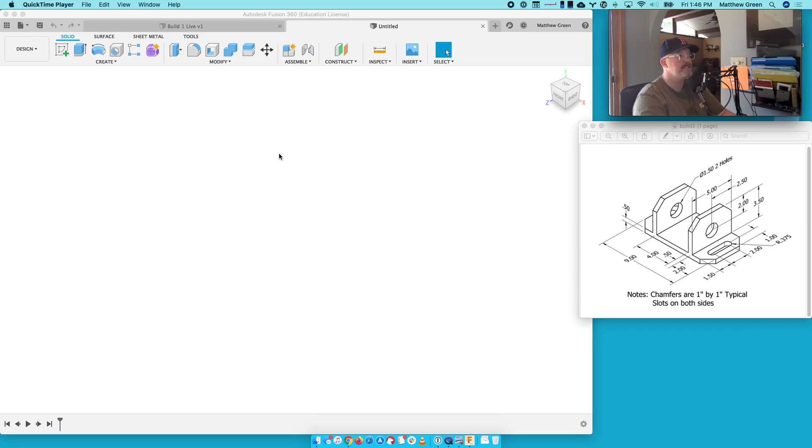We're going to do Fusion Build 2, Autodesk Fusion 360. How many times can I say Fusion before we start? Fusion. I can say it more times. I can say it more times.

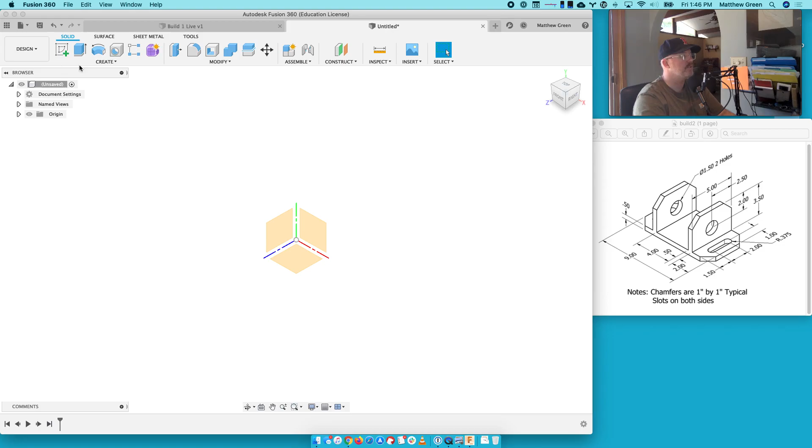All right, so I've got a new design here. I'm going to turn the origin back on just for the beginning. And I'm going to make a base plate rectangle that is 9 inches by, what's this dimension? 5 inches. So let's make a sketch on the bottom. Go ahead and hide my origin. Rectangle. 5 in that direction, 9 in that direction. Hit return, finish sketch. Home to zoom out.

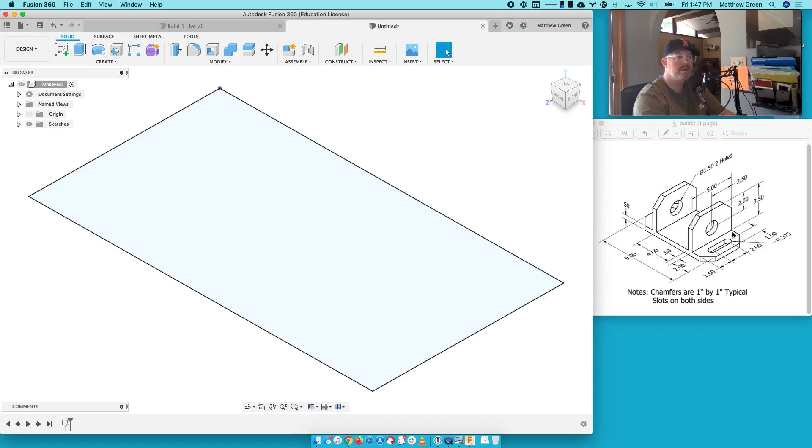Looks great. All right, now we're going to extrude up. And I need to figure out how far. All right, the base plate itself is 1/2 inch thick. And then these big old tab thingies, I don't know what to call them. They're 3.5 inches. So let's extrude a distance of 0.5 plus 3.5. Yes, I know that's 4, but I'm showing you an example of adding in Fusion. All right, now I got a big block.

Let's do some cutting. All right, let's see. First flap here is 2 inches in from the side and 1/2 inch up. So how about I do a rectangle that comes down 3.5 inches and comes over 2 inches. How about that? And then let's mirror because it's fun. Mirroring is fun. I like mirroring. Mirror that piece and that piece over that line. Boom. All right, we're mirrored.

Now we got to cut out the middle. So there's a distance of 1/2 inch. So these things are each 1/2 inch thick. How do I want to do that cut? Let's do a line that goes over 1/2 inch. Let's do another line that goes over 1/2 inch.

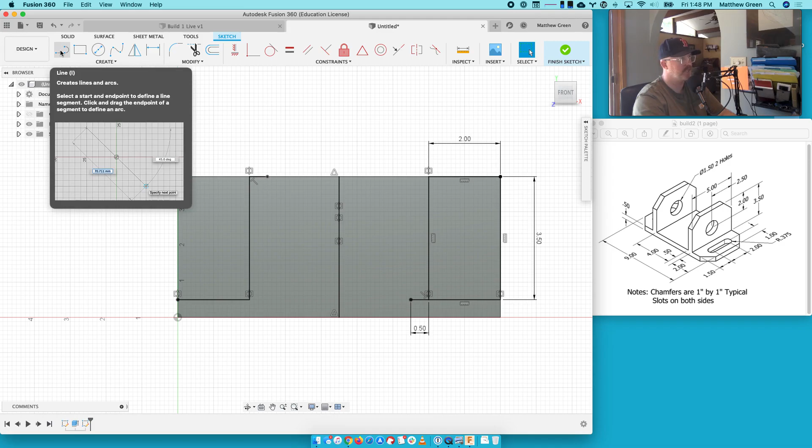And I didn't say this, but I was using the keyboard shortcuts. I was pressing L for line. Notice how when that menu pops up, it shows you an example. And right next to line in parentheses, it says L. That's the keyboard shortcut. So now I'm going to say R for rectangle and go from opposite corner to opposite corner. And look at that. I got 3 rectangles.

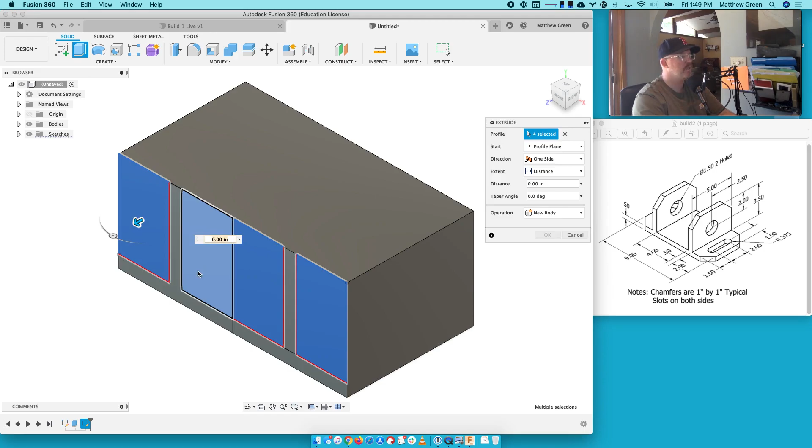1 surface holding shift. 2, 3. It sliced it because of the midplane. And we're going to go ahead and extrude through, slicing. We love it. We accept it. We're home.

All right. Now we got to cut some chamfers. We have a tool, thank goodness. Let's do a chamfer tool on some edges here. That edge. Now, what's my distance? It says all the chamfers are 1 inch, so that's good. Then I can do it on... Is it going to let me select? It's not going to let me select. All right, I think I got excited.

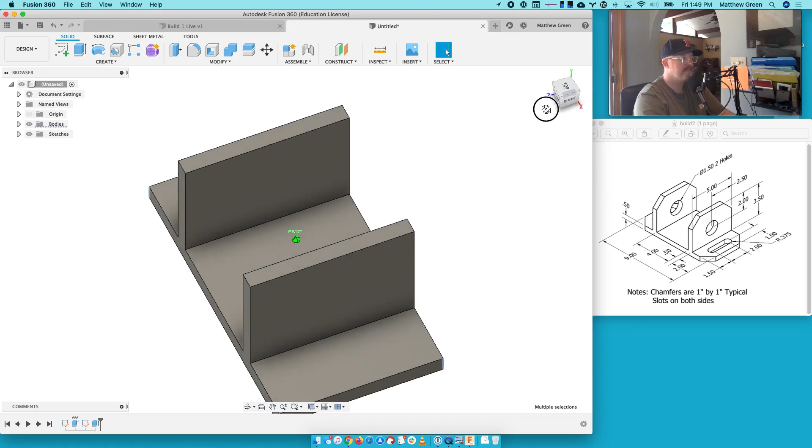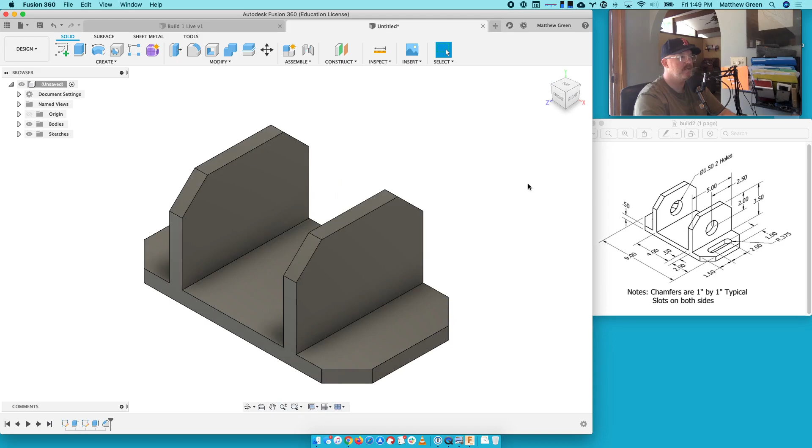Let's hold shift and select a bunch of edges. 3. I'm going to rotate around. They're still highlighted. I'm going to hold shift again, click that edge, and then that one, that one, that one, and that one. So I have 8 little line segments in blue. Chamfer tool, 1 inch. Love it. All right, chamfer's done. That's pretty slick.

Let's cut a hole through this surface. Down 2 inches from the top and 2.5 inches over from the side. So notice what happens. I'm not clicking down. I'm just sort of going to this here, and I'm going to this here, and then look at these dashed lines it creates. It knows where I want to be. Because I actually need to measure in 2.5 that way, and 2 down. So 2 down and 2.5

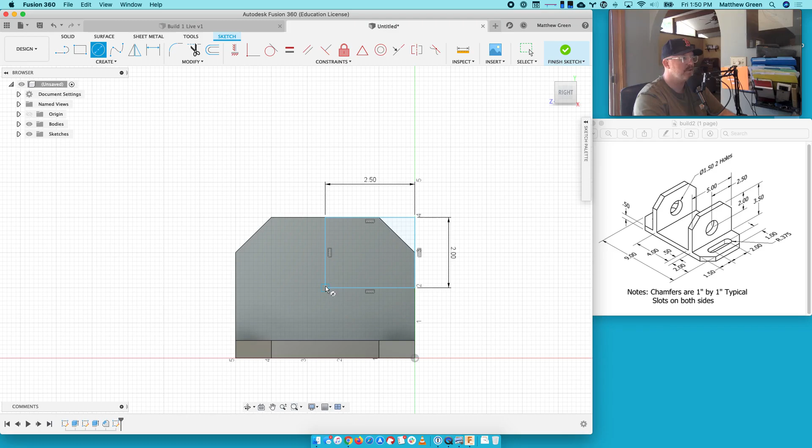that direction. This now is the center of my circle, which it says is 1.5 inches in diameter. Surface tools. Okay, y'all. There we go. Boy, I got a little excited there. Center of the circle on the intersection point, 1.5 inches. Love it. Let's now hold shift to select both pieces. Extrude through the object. Oh, and we're getting so much closer.

Now is this last little bit of complex geometry, which I think is a couple circles and a rectangle connected. And we're going to do it here, and then we will mirror across. All right, so we need to come 1 inch in and how far down? 1.5 inches down. So I'm going to go an inch that direction and 1.5 inches here. That's going to be the center of my circle, which its radius is 0.375. So 0.375 times 2 will give you the diameter of 0.75.

I think I mentioned this already in this video. I'll probably mention it again. I like mirroring. So I'm going to do some trimming because that's fun. And I'm going to do some mirroring of this object across this line. I like it. Now I'm going to use some line segments to create some intersections. So notice I have an intersection here and here. That's going to allow me to go to the rectangle tool and snap a rectangle in place. Let's use the trim tool again, not because we have to, but because trimming is so much fun.

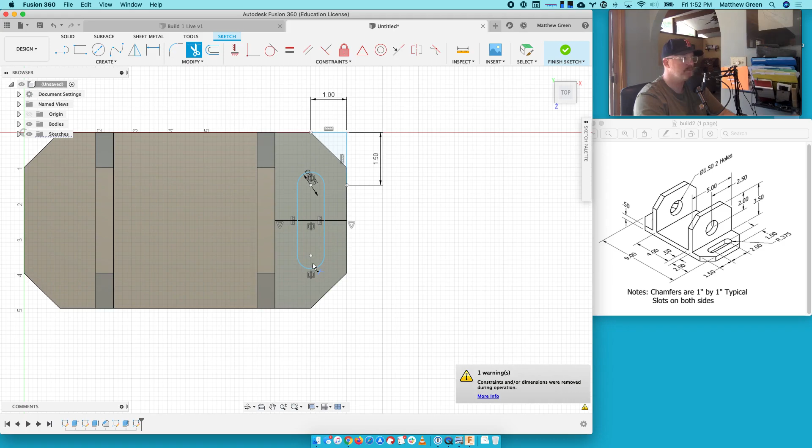Now hopefully I can convince you that what I have here in this shape is that complex geometry. So I'm going to hold shift and select this, and I'm going to extrude down through and call it good. Now, here's the problem. I want that same thing on the other side. So I remember the possibility there was a way for me to mirror actual solid tools. I think there's a mirror tool. Should we mess with this for a second, or should I go back and do it the other way? You know what? I'm going to go back and do it.

So what I need now is a midline, which I don't have because I'm actually technically on this surface, which has been interrupted. So I'm going to figure out where that midline is. It is halfway through 9 inches. So I'm going to go from that rectangle over, again, pretending like I don't know what halfway through 9 inches is. It's 9 divided by 2.

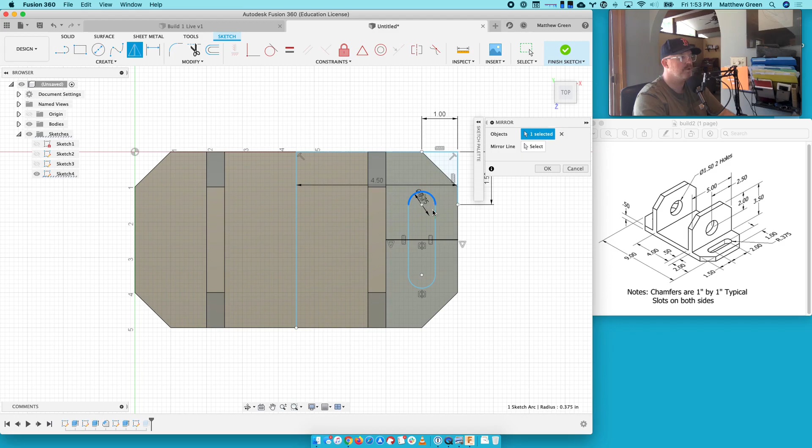And you know what? Instead of a rectangle, I'm going to use a line segment because really I just need a point. So 9 divided by 2 gives me that location. Drop a line in again. It's going to want to be perpendicular, so that's good. So now I should be able to use my mirror tool to mirror, holding shift, this and this across this line. And we got it.

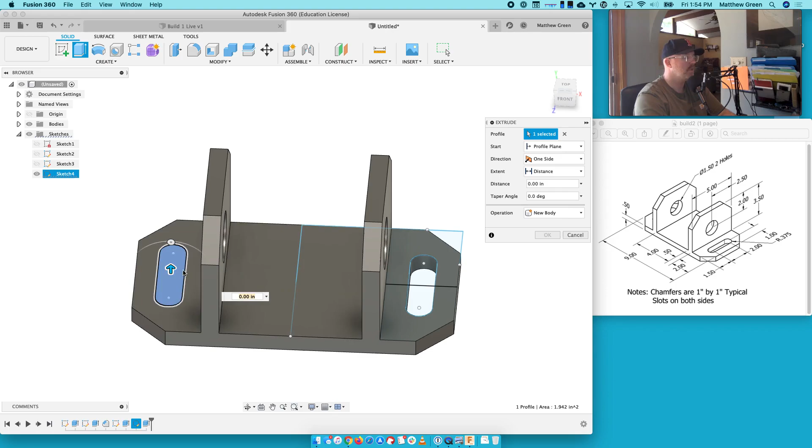All right, now I have, if I make that sketch visible and rotate around, I have a surface that I can extrude the other direction. Love it. I think if I hide my sketches now, that is build 2. All right.